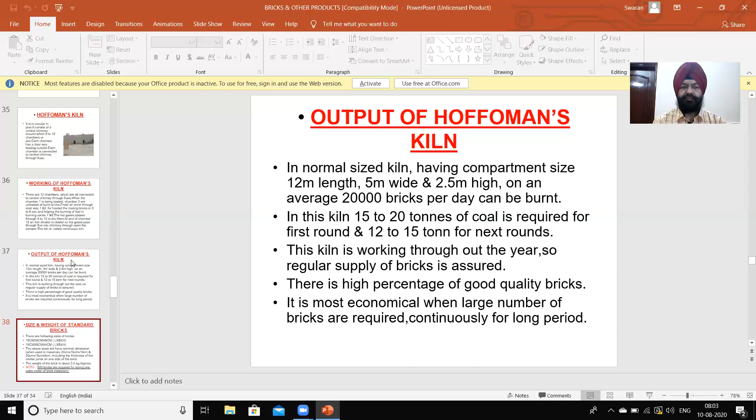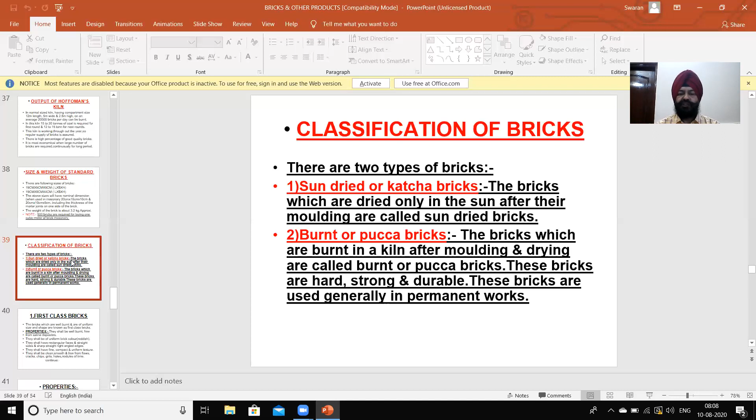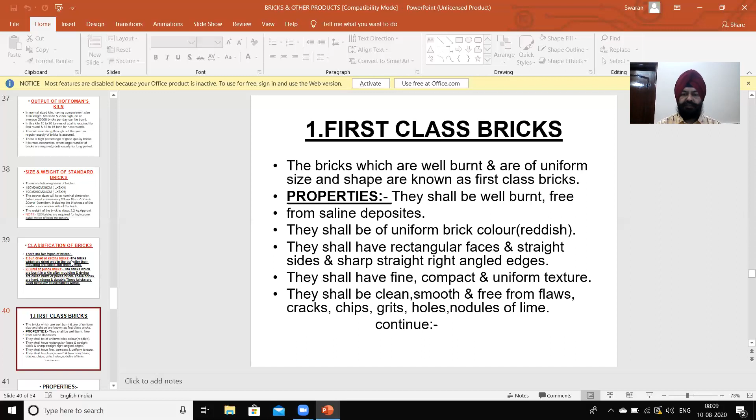They shall have fine, compact and uniform texture. They shall be clean, smooth and free from flaws, cracks, chips, grits, holes, nodules of lime, etc. So these are the properties of the first class bricks.

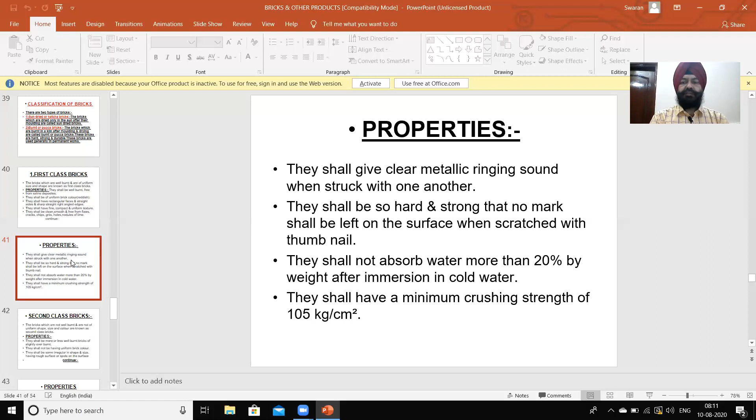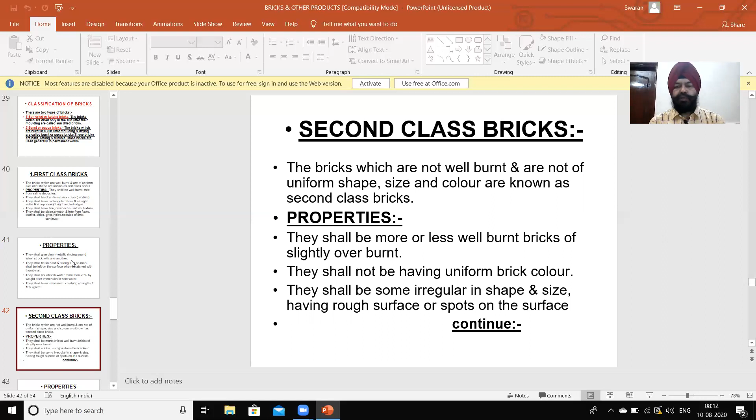Properties of second class bricks: they shall be more or less well burnt bricks, slightly over burnt. They shall not be having uniform brick color. They shall be somewhat irregular in shape and size, having rough surface or spots on the surface.

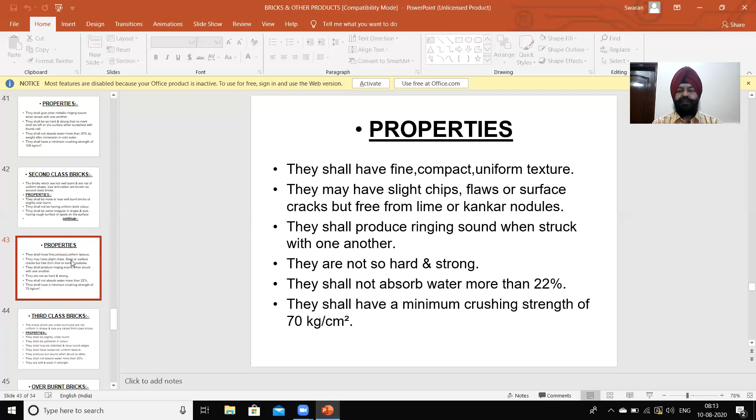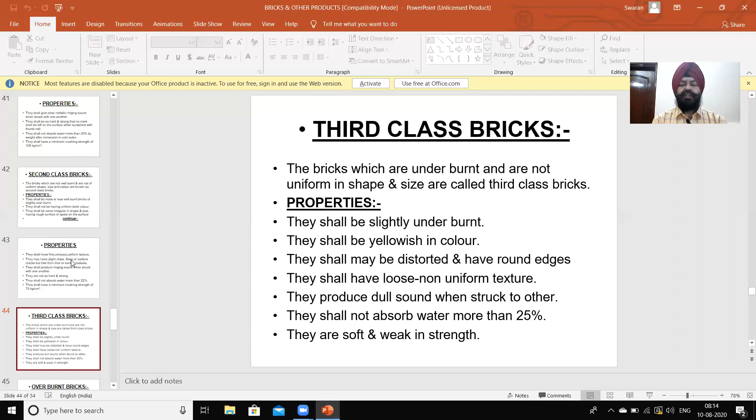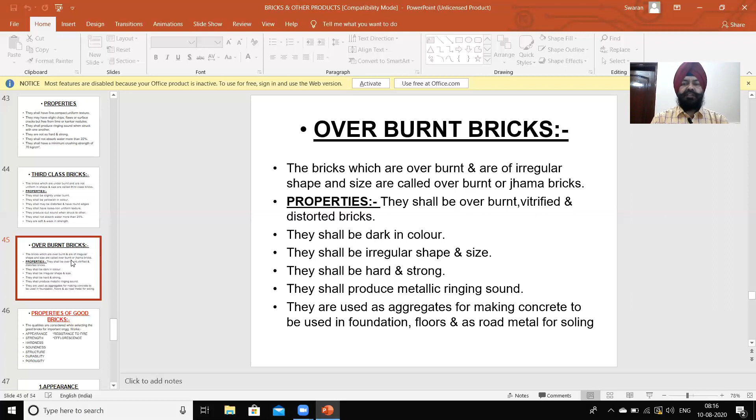So these are the four types of bricks: first class bricks, second class bricks, third class bricks, and overburnt jhama bricks. Next is properties of the good bricks. Good bricks means first class bricks which have uniform shape and size, color, metallic ringing sound, strength, water absorption not more than 20%, free from all flaws, etc.

So properties of good brick are the qualities considered while selecting the good bricks for important engineering works or projects. Number one, appearance. Number two, strength. Number three, hardness. Number four, soundness. Number five, structure. Number six, durability. Number seven, porosity. Number eight, resistance to fire. Number nine, efflorescence. So these are the main properties considered while selecting the bricks from the kiln burnt bricks. So we have to discuss one by one.

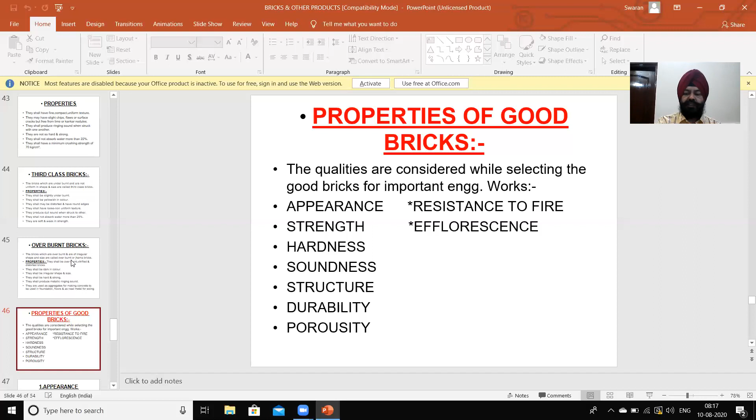Number one, appearance. A good brick should have regular rectangular faces with sharp and well-defined edges. It should be clean, smooth, free from flaws, cracks, grits, nodules of lime. It should have uniform red color.

Number two, strength. A good brick should be strong enough to take the specified load of the structure. It should have minimum crushing strength of 105 kg per centimeter square. A good brick should not break when dropped over another brick from 1.25 meter height.

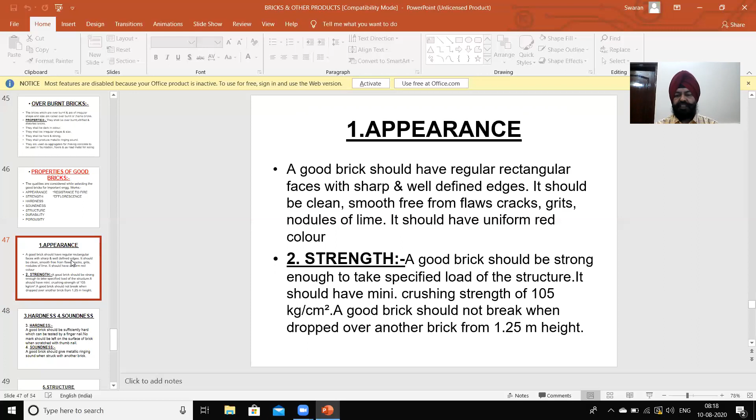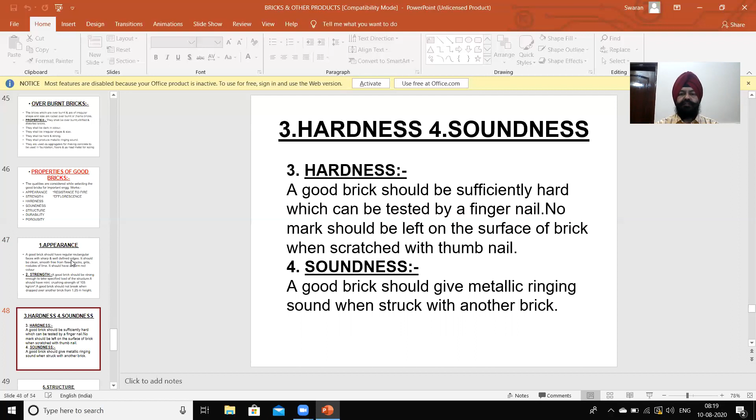Number three, hardness. A good brick should be sufficiently hard, which can be tested by a fingernail. No mark should be left on the surface of the brick when scratched with a thumbnail. Number four, soundness. A good brick should give metallic ringing sound when struck with another brick. So these are the properties of the brick: hardness and soundness.

Next is structure. A good brick should show fine, compact, and uniform structure in broken form. Number six, durability. A good brick should be able to resist the effect of weathering agents like rain, sun, temperature variation, frost action, etc.

Number seven, porosity. A good brick should be less porous so that it may not absorb more than 20% of water when immersed in cold water for 24 hours. So porosity should not be high; not absorb water more than 20% when immersed for 24 hours in cold water.

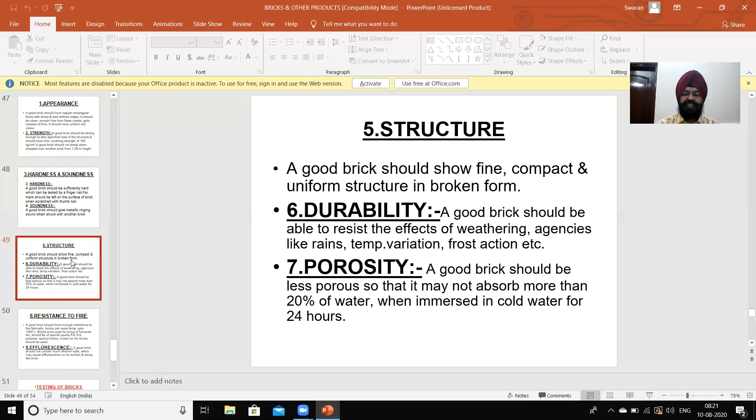Next is resistance to fire. A good brick should have enough resistance to fire. Normally, brick can resist temperature up to 1200 degree centigrade. Bricks to be used for lining of furnaces, etc. should be of special quality. For this purpose, special bricks known as fire bricks should be used.

Number nine, efflorescence. A good brick should not contain much alkaline salt which may cause efflorescence on its surface and decay the bricks. So these are the qualities or properties of the good bricks which we use for the various bigger projects, any type of civil engineering project structure. So we must check the qualities of the bricks. These are minimum.

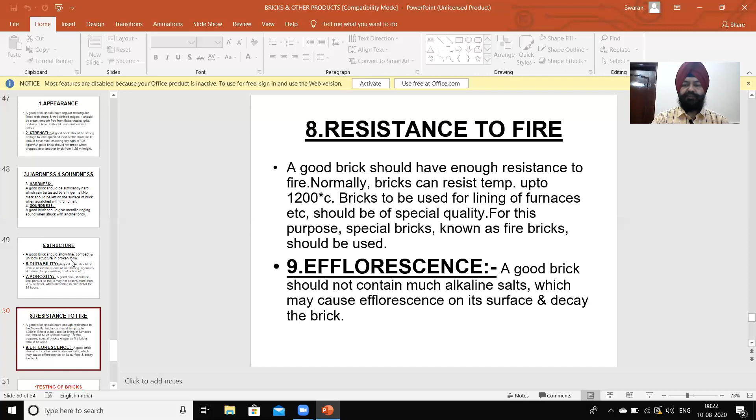Next topic is the testing of bricks. Before using the bricks for any building work, they should be tested to know their suitability for the work. Following tests are generally performed for testing the building bricks: compressive strength test, water absorption test, efflorescence test.

So, compressive strength test. In this test, we also check the strength of the bricks. So first of all, we fill the frog with 1:3 ratio mortar, and after that we immerse it in water for 24 hours.

After removing from the water and drying, the bricks are tested for compressive strength in a compression testing machine. So we have to check the strength of the bricks by compression testing machine one by one.

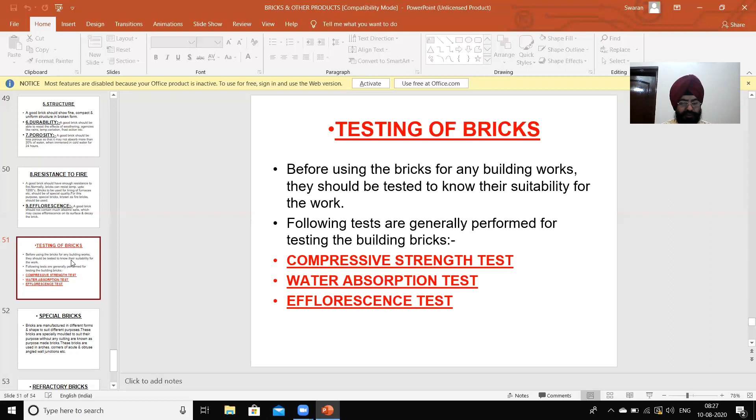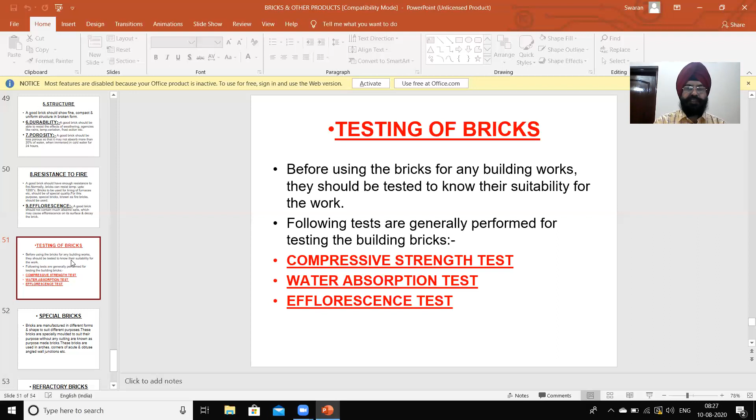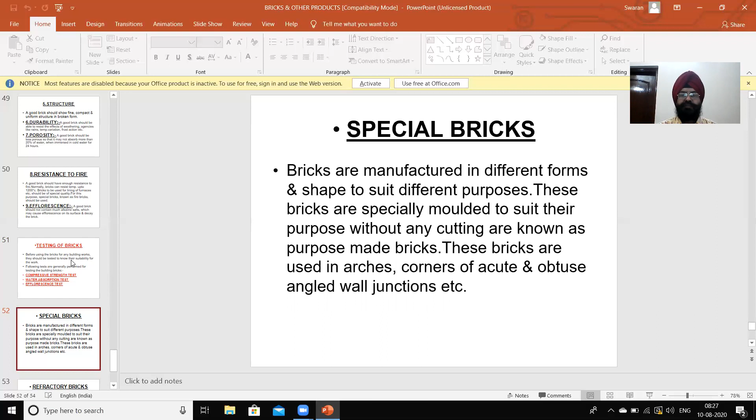So these are our testing of bricks. Next is special bricks. Bricks are manufactured in different forms and shapes to suit different purposes. Bricks specially molded to suit their purpose without any cutting are known as purpose-made bricks. These bricks are used in arches, corners of acute and obtuse angled wall junctions, etc.

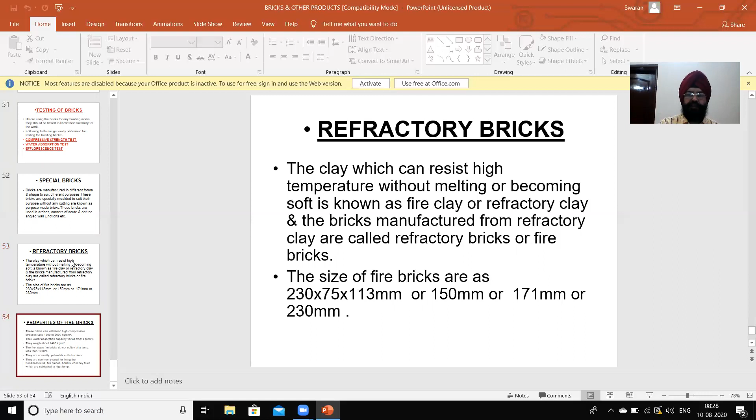Properties of fire bricks: these bricks can withstand high compressive stresses up to 1500 to 2000 kg per square centimeter. Their water absorption capacity varies from 4 to 10%. They weigh about 2400 kg per cubic meter. First class fire bricks do not soften at a temperature less than 1700 degrees centigrade. They are normally yellowish white in color.

They are commonly used for lining furnaces, kilns, fireplaces, boilers, and chimney flues, which are subjected to high temperature. So this is our today's topic.